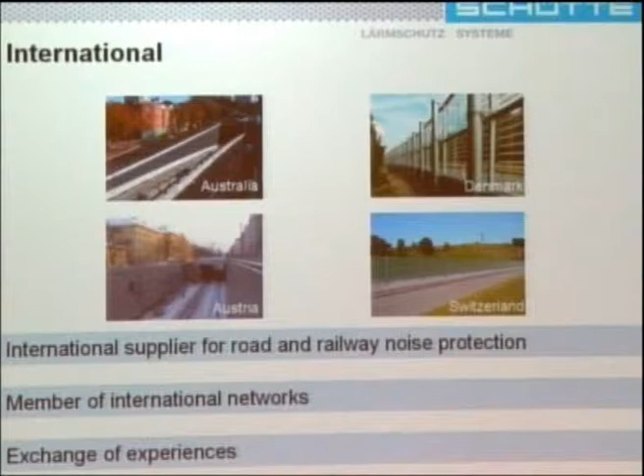The company Schütte is a member of international networks. We have exchanges of experience with all the different architects worldwide, in Turkey, in Estonia, Latvia, Poland, Great Britain, France, Spain, Austria, and further states.

We are a German market-leading company. We have 50% of the market in aluminium noise barrier systems. We sold over 3 million square meters of noise barriers worldwide. Further, we have the CE certification made in Germany. It is according to EN 14388-2007. And we can make complete solutions from statics to planning to implementation.

But before we come to the testing results, I have to explain the health aspect. The company Schütte is looking after your health. That is the most important point in our life, I think. We have special elements which can make 40% less noise. But I will explain this element a little bit later according to the noise maps.

Now we have here some testing standards for aluminium noise barriers. I know there exist different noise barrier systems, plastics, wood, concrete, but the aluminium noise barrier systems have the most experience. For example, our noise barrier systems have a lifetime of over 30 years. And we have elements in Germany next to Bremen which are still working after 30 years and the color is still good.

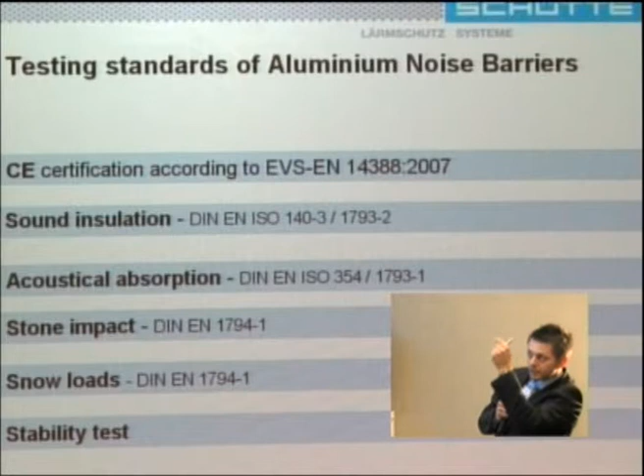What do you need to make a good noise barrier system, which tests are important? The first one is the CE certification. The CE certification includes all the different tests: the sound insulation, the acoustical absorption, the stone impact, the snow loads, and the stability tests. So the CE certification is the main certification which is needed for the noise barrier system.

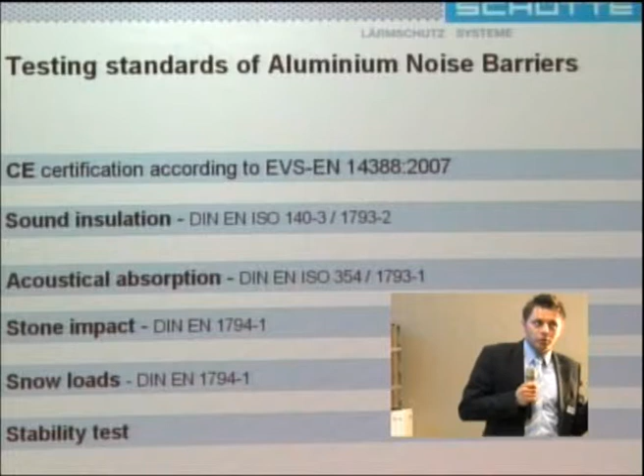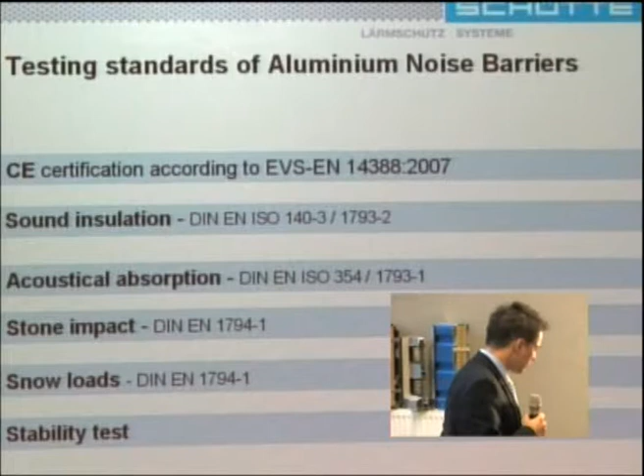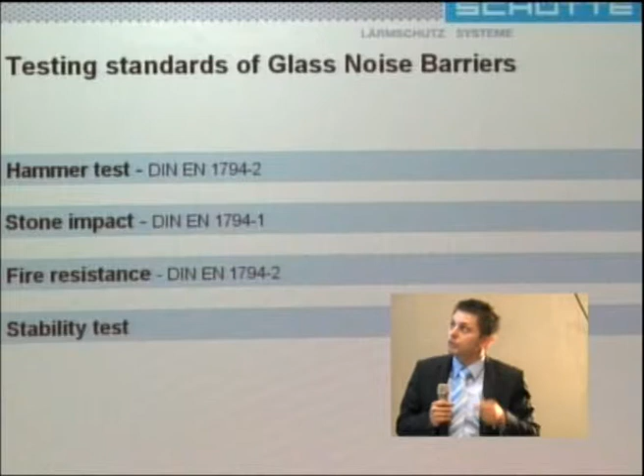For example, if you compare the aluminium elements with the wood elements, you need no fire resistance test here, because aluminium is fire resistant. The next element is a glass noise barrier system. Here we have, for example, the fire resistance. The glass noise barriers have a fire resistance test. This is CE marked. We have the stone impact test, and we have a hammer test.

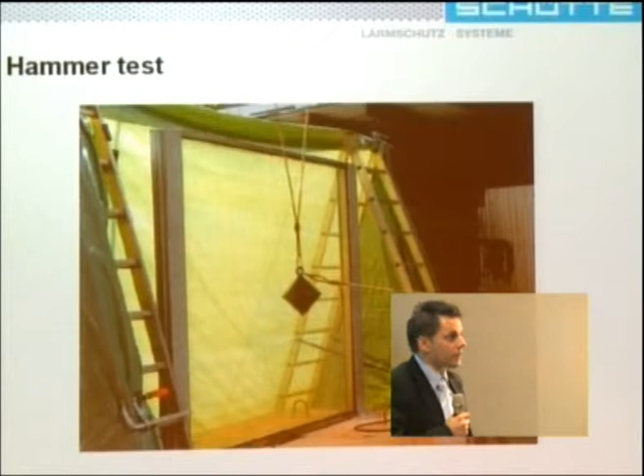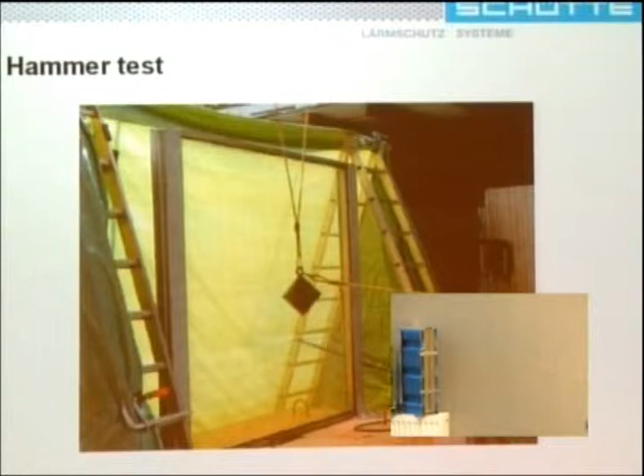Here's one picture of a hammer test. For glasses there exist two different hammer tests. You have 6 categories for testing the glasses. The first 3 categories have a hammer with 300 kilograms. That is that hammer. The categories 4 till 6 have the hammer of 600 kilograms.

On the market, there exist different glasses. I will explain it a little bit later, but there exist acrylic glasses with polyamide, there are polycarbonate and normal glasses.

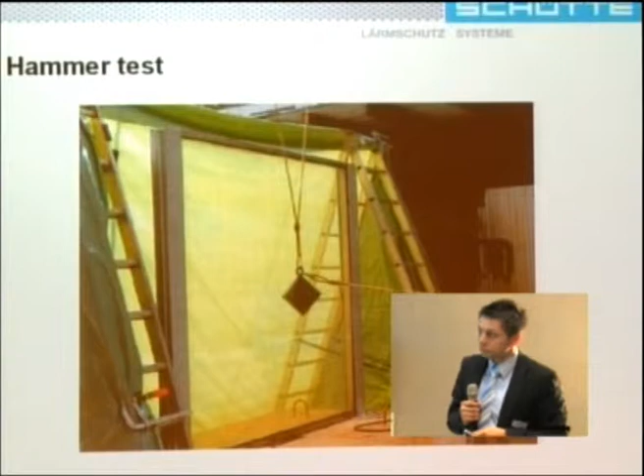But let's look first at the foundation of the noise barrier. We have the foundation, deep foundation, we have a post, and we have the concrete socket and the elements between. It is really important for the railway in Germany, for example. If you have a railway track and you want to use noise barrier systems, you have to calculate it.

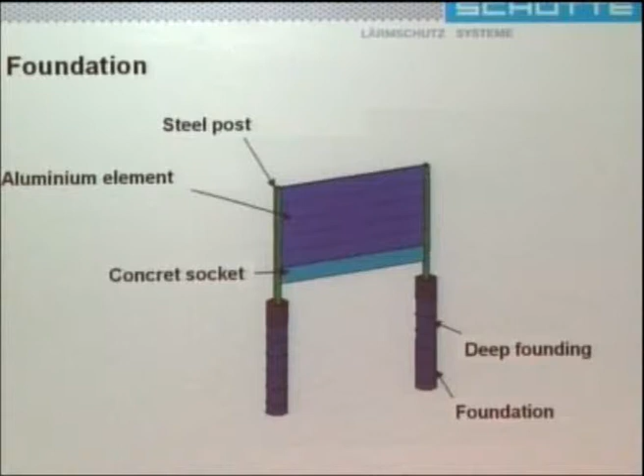Here we see a testing track. You can see the noise barriers, the complete system is working. I will show it that way. The one post is going that way, the other in the other way. So the elements between the posts are swinging. And you have a lot of dynamic loads there. And to solve these dynamic loads, you need special elements. You need special tests if you want to build noise barrier systems next to the railway.

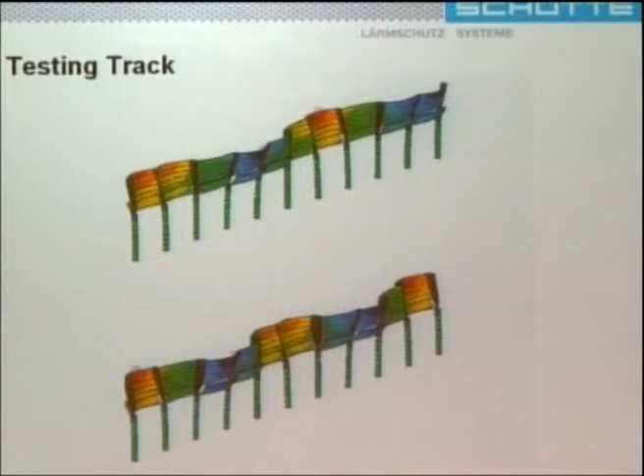The company Schütte is testing every part of the noise barrier system. Here you see the sheet tests, which simulate over 50 years. So we tested every part of the noise barrier for 50 years. The test is as follows. It's simulating the train which is driving on the track 4 times an hour, and this is shown on the machine. Here, another side plate test.

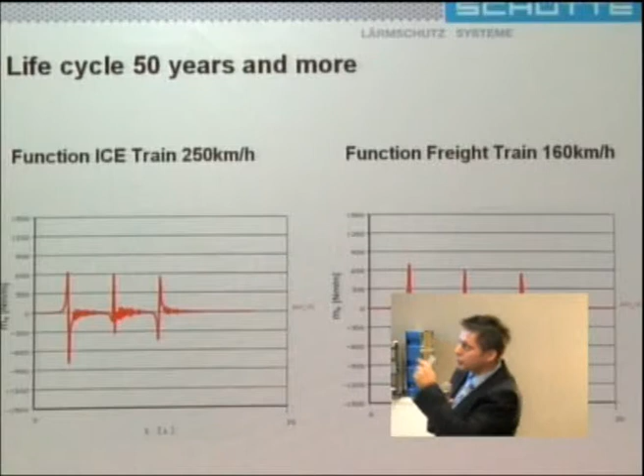Here you can see, for example, the function of the ICE train and the freight train. The swinging of the post when the ICE is driving is not similar to the freight train, because you can see here the amplitudes are not similar. In the function of the ICE, the amplitudes are smaller, but then you have more amplitudes. The connection part is the second part. Here you can see it. It's the connection part of the ICE between the wagons. You have also one amplitude. And the rear. It's showing the train which is passing the noise barrier system.

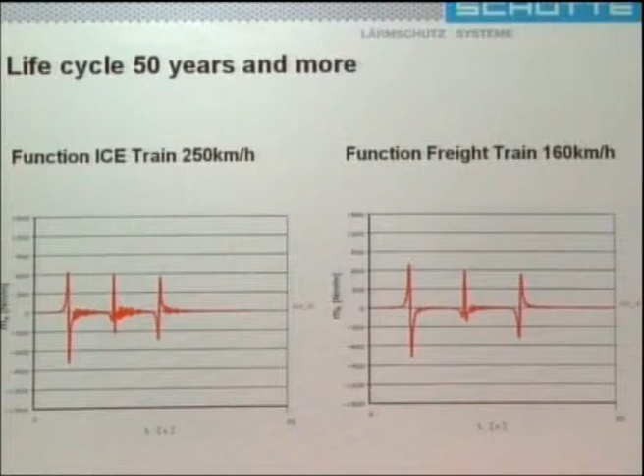In the function of the freight train, here you can see the amplitudes are a little bit higher. But here you have no other amplitudes. Then you have here the connection part and the rear end of the train. So you have different functions. You have to take care of 2 different trains, and you have to make sure that your noise barrier works in every case.

And if you care of this, you will be certificated by the DB, Deutsche Bahn. So it's very difficult to get this certification of the DB, but we got it as the first company in Germany. But let's come back to the noise. That is the main point.

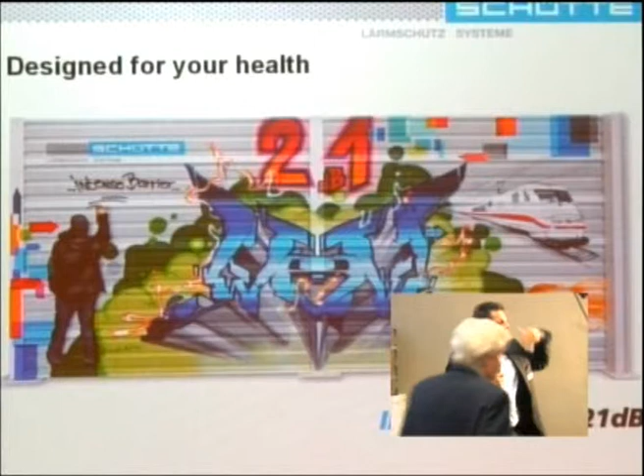Noise is not only loud. Noise is also colors. If you wake up in the morning and you see a gray wall, concrete wall, you're feeling bad. And it's raining and the snow is coming and it's dark. I think if you have different colors on your noise barriers, the life is more happy and you're more relaxed. So the company should try to combine the colors with a good high-level noise barrier system.

We have a special system which is absorbing 21 dB. Professor Middelberg showed even what noise barriers are needed. If you have, for example, the reflecting street. If you have a higher absorbing level, it's a better level, it's a better noise barrier, and you have less noise.

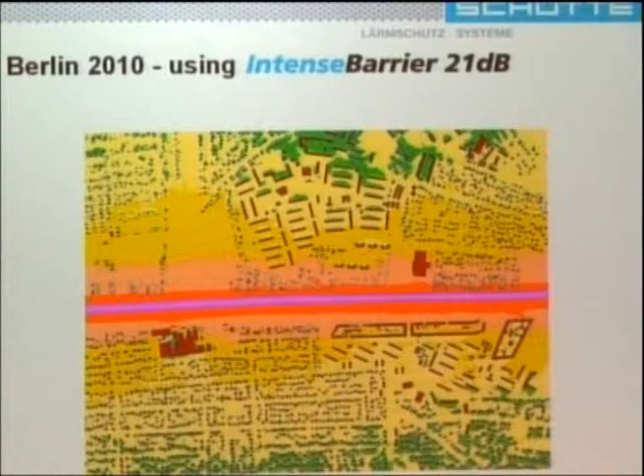That means you don't need special windows. You don't need more costs for windows. You're saving a lot of costs. Altogether, the 21 dB element saves 40% of the noise. It's the highest standard in Europe.

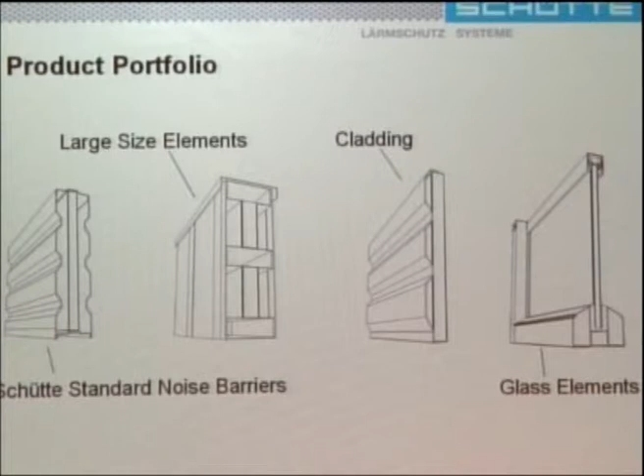Let's explain a little bit our product portfolio. The first element is the Schütte standard element. The second element is the large size element, then the cladding system and the glass elements. Our aluminum noise barriers are all CE certificated in Germany. They are seawater resistant. They have a permanent anti-graffiti coating. So if somebody paints something on this, you can wash it away.

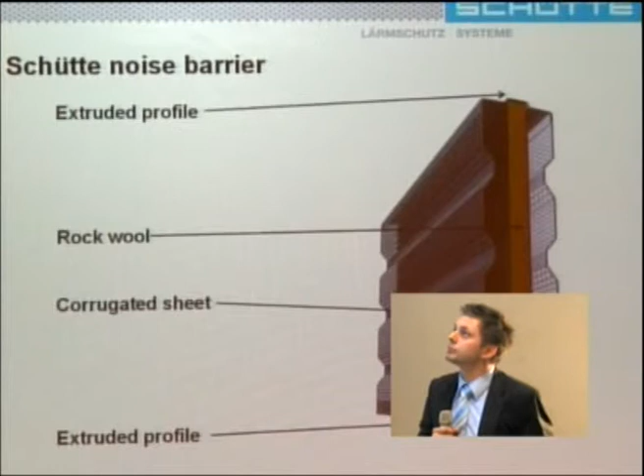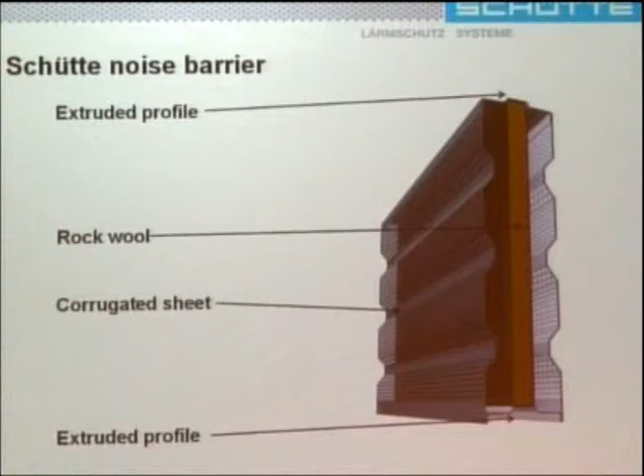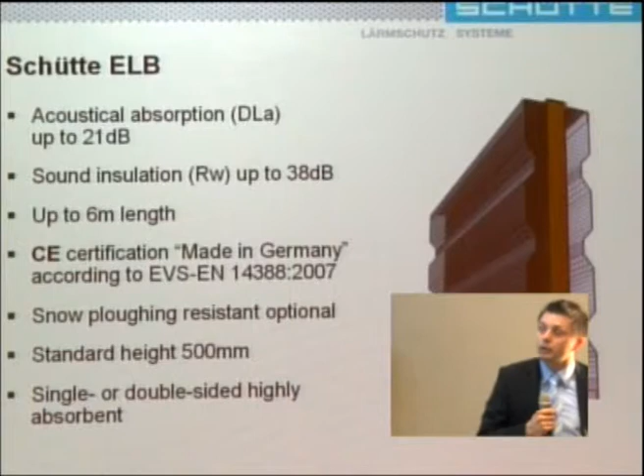This is a standard aluminum product. It's behind me, you can see it here on the right side. You have the extruded profile, the rock wool, the corrugated sheet, and the extruded profile on the bottom. This element has an acoustical absorption of 21 dB. Further, you have the sound insulation of 38. It's really, really high. The standard of acoustical absorption of all elements, you can say, is 10. The standard of sound insulation, Europe-wide, is 30.

Further, the main point is you can build these elements up to 6 meter post distance. Normally the distance of the elements is 4 meters. You can save costs of 20% minimum if you're building 6 meters and not 4 or 5 meters.

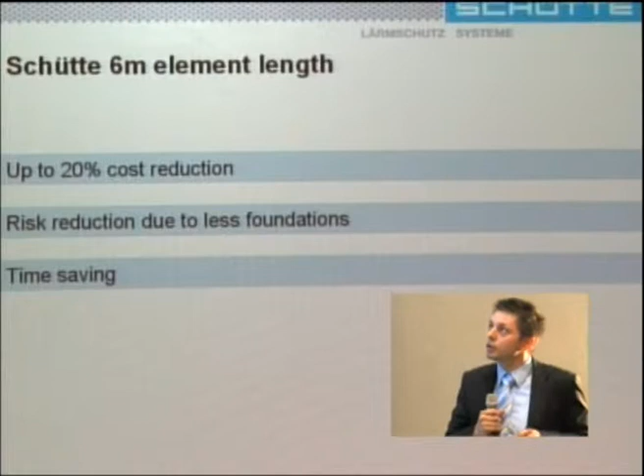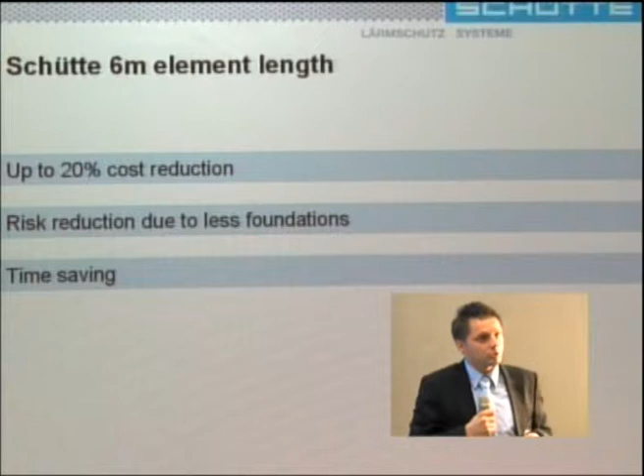Right. So with the Schütte 6 meter element length, you can save 20% of the cost for the whole project. You have a risk reduction because you have less foundations. And you have a time saving because of the mounting of the elements.

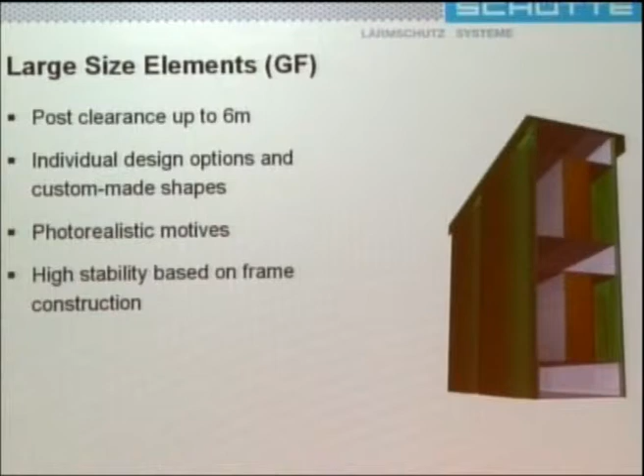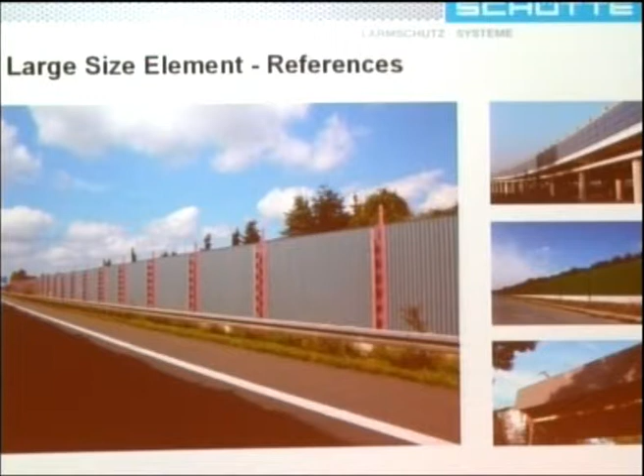The next element is a large size element. This can be built 6 by 4 meters, so you have 24 square meters in one element. And for this element, there exist different solutions. On the top, you can see photorealistic elements. Here you can see a special product where the posts are not seen. And here different colors of the posts and different structure. It's a sinus structure of the element.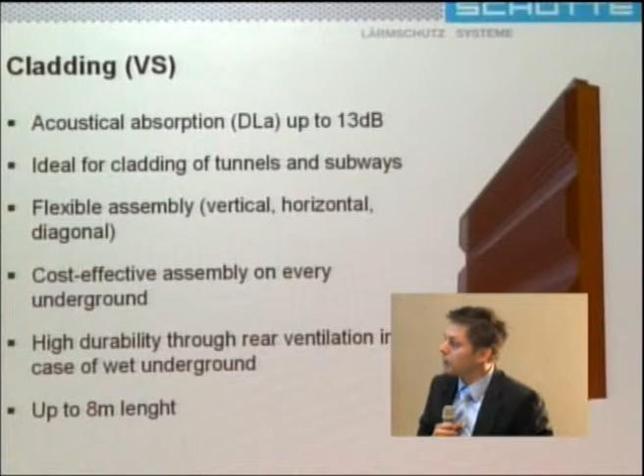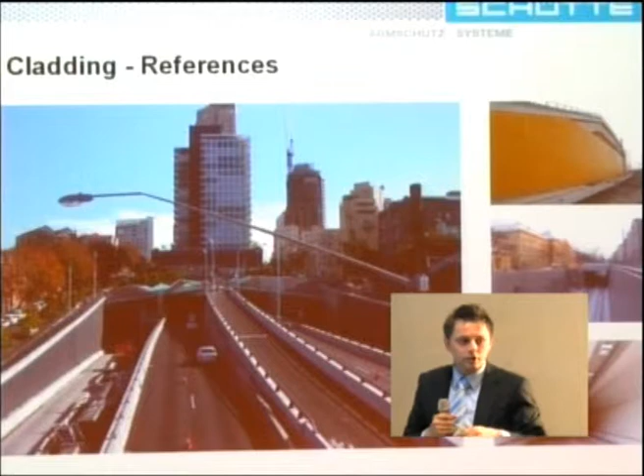A similar project is also here in Vienna, directly in the town, where the metro is driving. There are living, I think, about 50,000 people next to the street, next to the metro station. And we have here completely on the left and the right side a cladding system catching the sound, and the people can sleep and are healthy. That is the main important point.

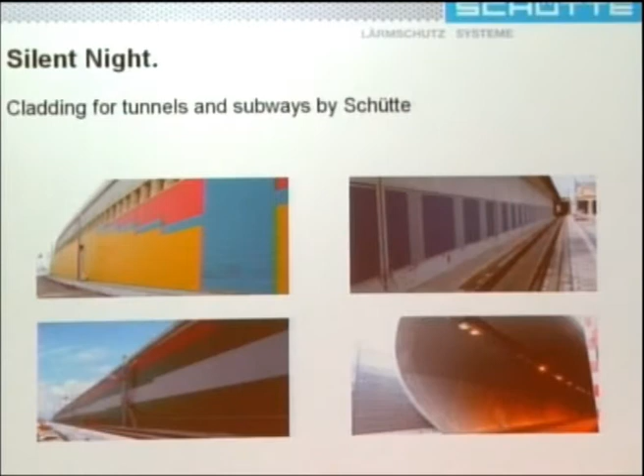Here are different solutions of the cladding for tunnels. This solution is also very important because we have uneven surfaces. So you have uneven concrete sockets, and you want to make the noise barriers there. And we have a special system with profiles which can make the wall even. Also important are the different colors you can see.

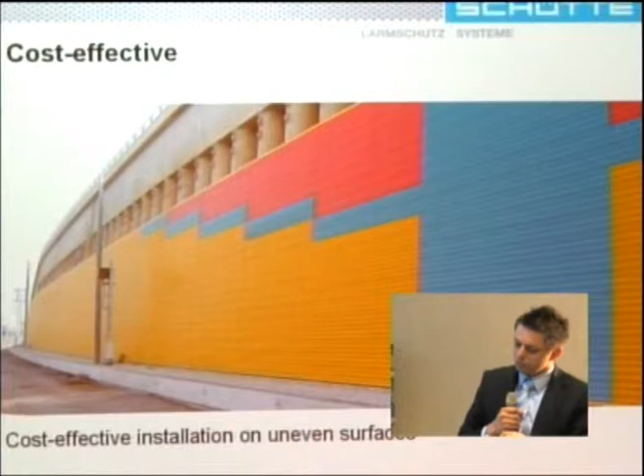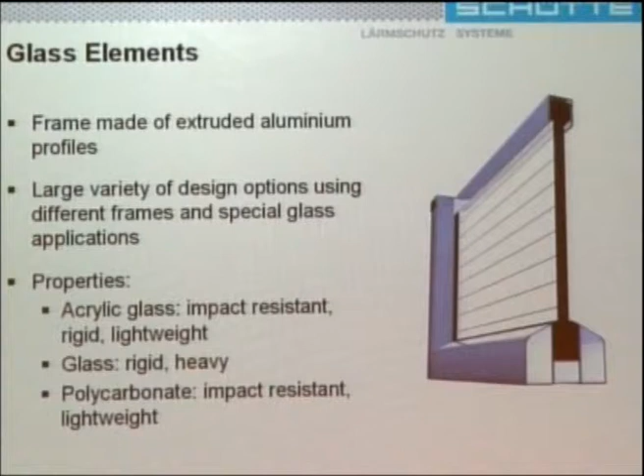The next system is a glass system. We have different glasses. We have acrylic glasses, normal glasses, and polycarbonate glasses. I think the market with acrylic glasses is 80% in Germany, 15% is glass and 5% is polycarbonate.

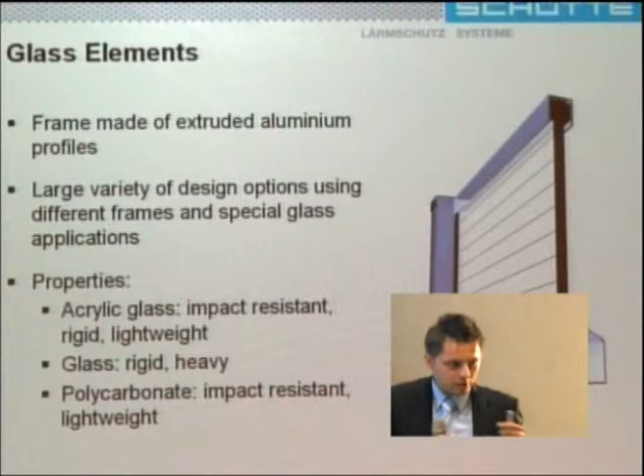It depends on the cost and what is needed, but normally against vandalism, the acrylic glass is the best thing, because if you have vandalism, it doesn't break. If you have normal glass, it breaks and has to be replaced. And in the town, nobody wants a high cost for replacing the glass systems.

Here you can see some different projects with the bird stripes between. That is very important for glasses, because the bird stripes are needed in Germany every 30 centimeters, you can say. In Austria, for example, you have no bird stripes. You have only some birds on the glasses. There's some difference between the German rules and the Austrian rules.

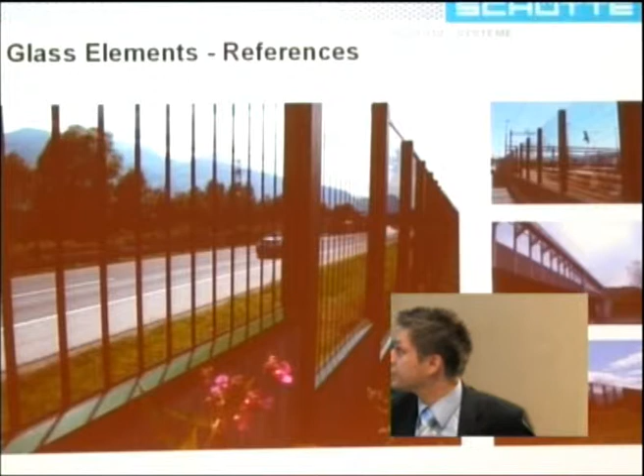We have also custom-made solutions. I think this is a big project we have because of the height of the wall. It's very tall, a 30 meters high wall for the Airbus A380. Behind this area, there's a residential area. The people can't sleep because there's a testing track between 6 and 20 o'clock in the evening.

And if they want to sit in the garden in the summer and have a barbecue, there's loudness. They can't speak together because of the testing of the Airbus A380. So the solution is to build a noise barrier wall, which is 30 meters high. And after that, the people can sit, drink beer, make a barbecue without any noise. So it is a good solution. A similar project will be built by our company in Frankfurt next year at the airport.

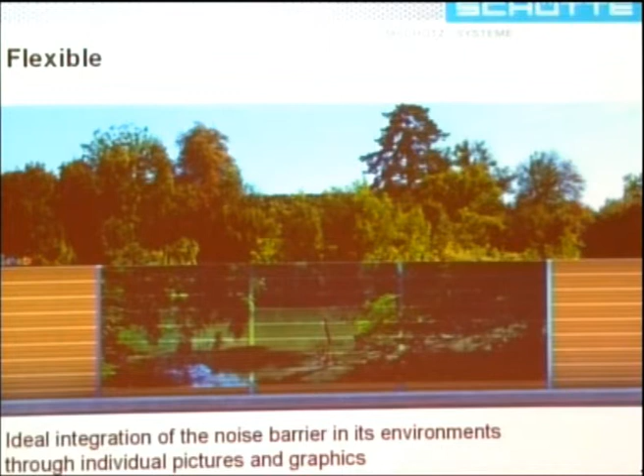Here you can see another way to build up noise barrier systems. There are photorealistic surface coatings. For example, this one is very, very nice. It was made before the noise barriers were built, and after that, we make the picture on it. And it works. We have also the absorption on it. We have small holes inside, and the absorption exists. But you have a nice photo put together on the wall. In the winter, we have some problems because we have to paint it white.

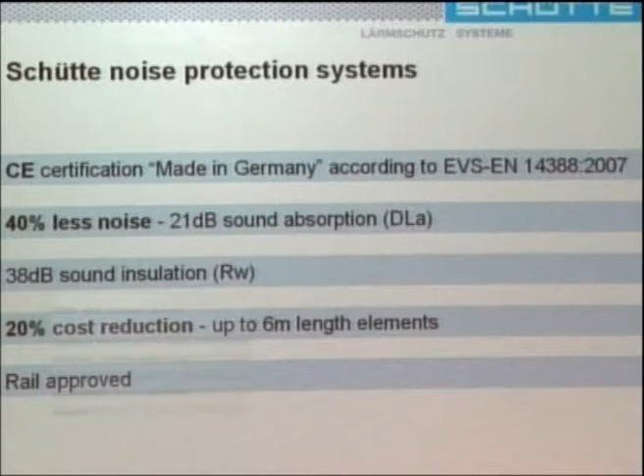So, our Schütte noise protection systems have the CE certification. We have 40% less noise with the 21 dB sound absorption. We have 38 dB sound insulation, and we have 20% cost reduction for elements up to 6 meters. Further, we are rail approved as the first company in Germany. So the baby can sleep next to the ICE train. These high-speed noise barrier systems have a long life cycle, up to 50 years, so much longer than the standards, up to 30. This is top quality made in Germany.

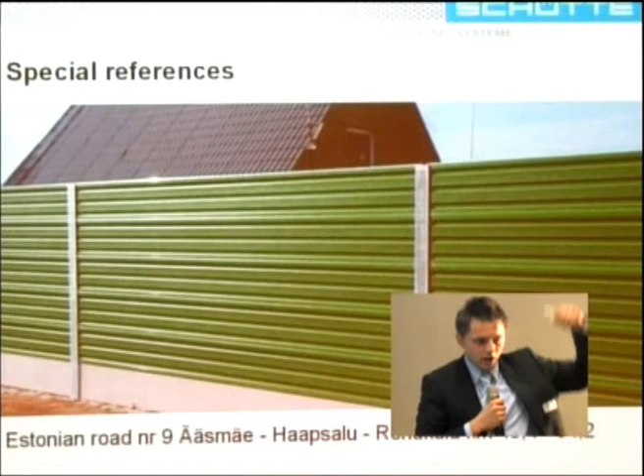So this is the end, but not really, because I have some reference photos of projects in Estonia, which I will show now. I don't know if I spell it right, but it's in Haapsalu Rohuküla. It is one project that we realized together with the road service. Here you can see the noise barriers next to the home. I think 2.5 meters high, together with a concrete socket 3 meters high. It's similar to Mr. Middelberg's solution with 3 meter high noise barrier walls.

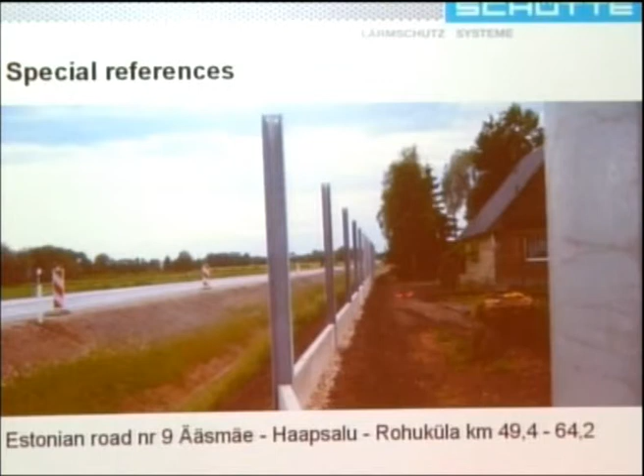Here you can see the concrete socket and the posts without the elements. Here also with this house. Here a little bit nearer. And we have also another project next to Tallinn, so next to here, on the Estonian road E20. I think it looks beautiful. It's different colors. For the eye, it's very beautiful.

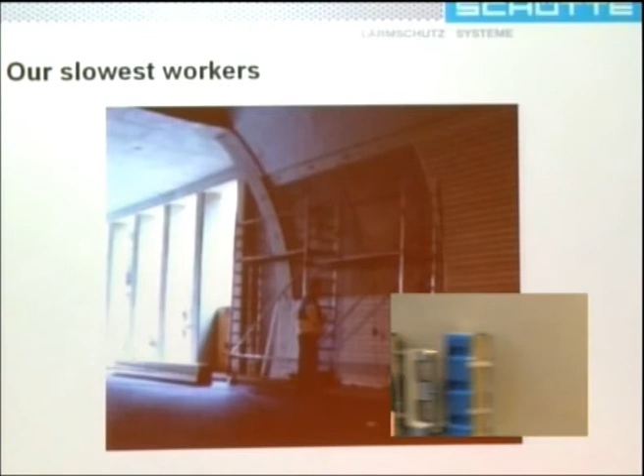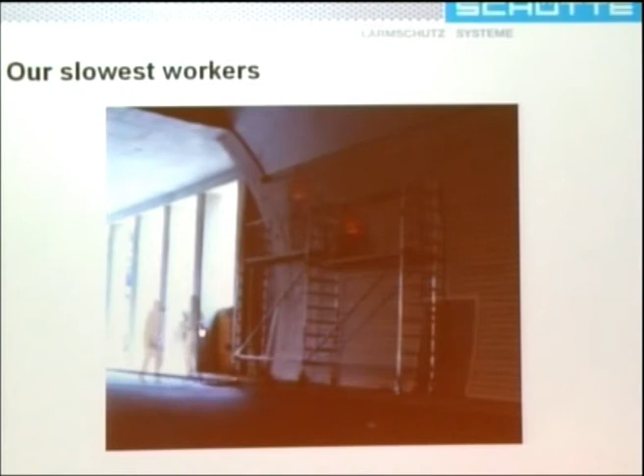And now, for the end, I show you the slowest workers from the Schütte company. It's finished. I hope the next project in Estonia will be a little bit faster, because they are very slow.